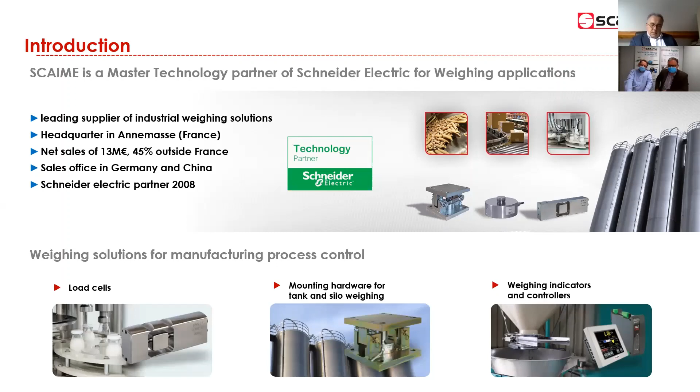So when we mean solution for weighing, we mean all the products designed and manufactured by SCAIME. That includes a very comprehensive range of load cells for all types of application and all types of capacities of measurement, from 200 grams for the very light weighing application, up to the heavy duty ones, 1,000 ton per load cell. It includes also the mechanical environment of the load cell, that is to say the mounting kits, which help to adapt the load cell into its environment, for instance, a tank or a hopper weighing. And third part of the measuring chain, the weighing indicators, the weighing controllers, and the related softwares.

So here we have a nice picture of a typical manufacturing site. And in this manufacturing site, SCAIME can display its areas of expertise, not only on plant engineering, but also on machine control. We provide solutions to both types, whatever the field of production, so it can be food and beverage, metals and materials, chemicals, waste, logistic, etc. So on the right-hand side, you see the types of application where we have a complete solution: load cell, mounting kit, electronics, standard platform weighing, of course, but also tank and hopper weighing, continuous weight, dynamic weighing, like belt weighing, loss in weight feeding, filling by batch applications, and sorting and check weighing applications. For all that, we have a solution or several solutions.

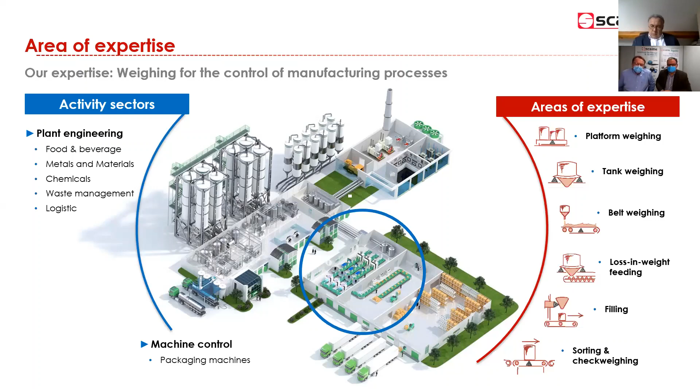So this is an interesting diagram which shows step by step what you can find in a production site. And at each step of the way, you have a possibility to face a challenge or a question of how do I weigh that? So it starts with storage and static weighing on silo, then some belt weighing, so weighing in motion, continuous weighing, loss in weight feeding, which is also another type of dynamic weighing, batch dosing, filling or bagging, so the packaging side. So we get closer to the end of the process and finally check weighing at the end of line.

Yet again, at each step of the way, SCAIME has a dedicated solution, not only with the load cell, but with some transmitters and softwares around those transmitters which are able to monitor specific applications, specific functionalities. All this being monitored globally by PLCs, and that's where the cooperation with Schneider Electric is highlighted.

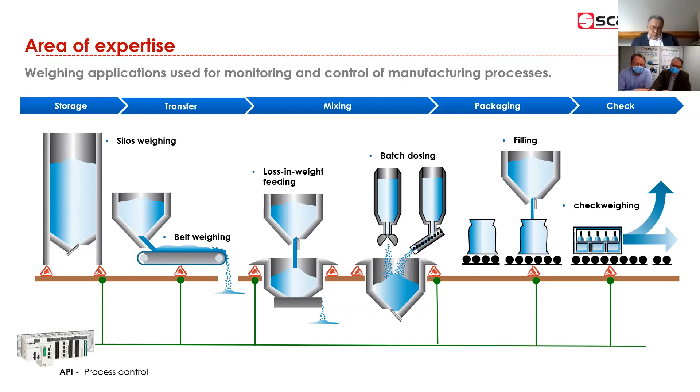This is an overview, and of course you have much more detailed information on our website, product by product, but this is an overview of the scope of load cells and mounting kits according to nominal capacities that you can use, that you can recommend, or that you can prescribe for some of the weighing applications. On the pictures on the top of the slide, you see different types of applications, different types of tanks, hoppers, hanging scales, belts, conveyor belts, etc.

Different types of mounting, different number of weighing points, let's say, and for each of them we have the answer, not only for the load cell but also for the mounting kit. Load cells that cover not only the range of capacity but also extremely rugged load cells adapted for rough environments with hermetically sealed design, and also possibly as an option ATEX protection for potentially explosive atmospheres. Okay, so clearly a very extensive range of mounting hardware.

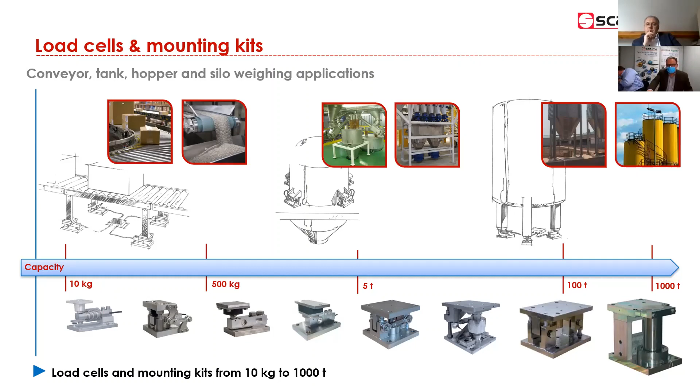So let's talk about the electronics which are connected to these load cells and how they interact. They are able to interact with the Schneider equipment. Everything comes into a name. The name is EcoStruxure, in which our systems are well adapted, and we are, I would say, easily included in these architectures. So we have two levels of capacity to offer weighing equipment.

We have the machine or plant level, but let's say it's more a midway between machine and plant, where we can offer our eNod4 series, which are electronic controllers able to communicate with the API using either Ethernet IP. It's clear that the trend of the market goes more and more in the direction of industrial Ethernet communication capabilities. CANopen, which is also a kind of network well used in the Schneider range for quite a few years. And for the remaining equipment that we can find on the market, RS485 Modbus TCP communication is also a solution.

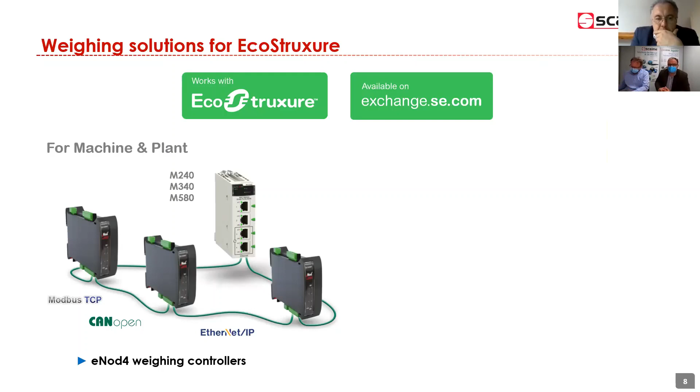For the plant level, we also have the possibility to provide our PMESWT, which is more or less, let's say, an eNod4, but in Schneider packaging, which gives it the capability to be directly connected to the backplane of the API. So in this case, we will talk of M580 and X80 drops in order to provide the weighing information to the automated system in order to do whatever it has to do in terms of mixing or measuring level or whatever.

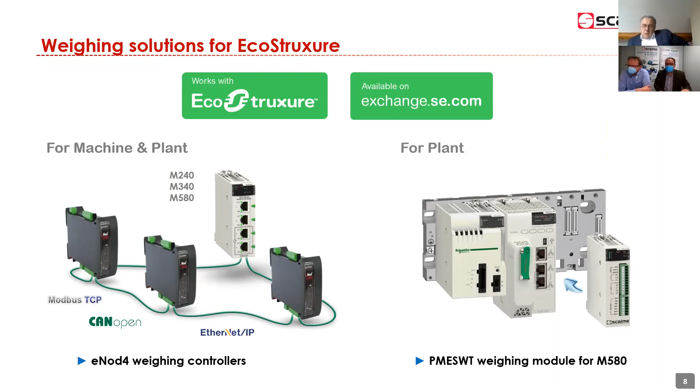So if we go a little bit more in detail, talking of this PMESWT, as I said, you can connect it directly on the CPU rack or on the X80 RIO drop. The communication between our module and the M580 is Ethernet, which gives a lot of transparency. Well, the transparency of the system is complete because it can go up to higher levels of automation down to the real device, and our device will be exactly in this wave. And we have, of course, a local possibility to connect an HMI independently from the PLC, and we also have local inputs and outputs.

So the load cells will connect on these modules. We can connect up to 6 load cells through a junction box, so everything can be provided by SCAIME and can be easily included in the Schneider architecture.

In terms of made easy, what would I say? Implementation. Thank you. I was looking for my words. Into the EcoStruxure Control Expert. So its integration. We do provide different tools.

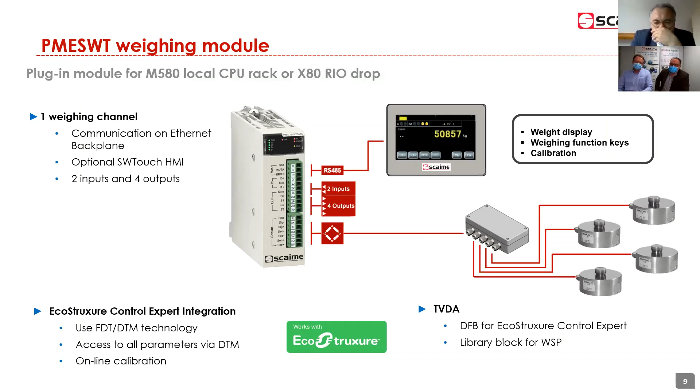Looking at the eNod4, this product has the advantage to be extremely versatile. We have two subfamilies. This controller can be included in little DIN rail boxes, so that you can just plug it by the API, or you can also have it inside a stainless steel housing, and you can also integrate on this housing an HMI, which will be connected to the eNod4. Doing this, you have some kind of indicator that can be installed locally in your workshop with a product which meets industrial standards. So that's for the product itself.

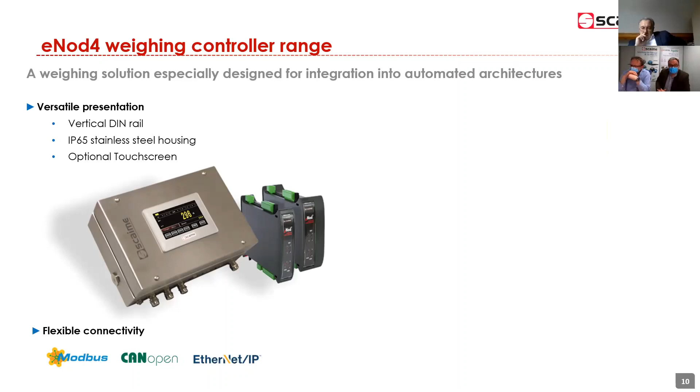In terms of communication, the product will be able to communicate with the Schneider equipment with either, as I said, Modbus RTU in RS485, CANopen, or Ethernet IP. To ease the configuration, we also provide as an option a Bluetooth communication port, which will be able to connect our eNod4 to a smartphone using our app. This eNodApp will bring all the features that you would find on an indicator. In other terms, you can access all parameters and all information from the eNod4 using this software

on your smartphone. We also have an integrated web server in the eNod4, so you can remotely access all parameters also, and do everything you need to do with the configuration. And we also have our eNodView PC software, which is a full solution, including all accessible parameters and the possibility to select and test different filters. So that's really a very extensive software, which makes life very easy for the people in charge of the installation and configuration.

We also have, for these eNods, a library called PLCLib, which is composed of a number of function blocks which have been developed in EcoStruxure Control Expert. They are able to be easily integrated into the EcoStruxure Control Expert system. All these function blocks are available from our website, free of charge, or you can also download them from the Exchange platform from Schneider Electric, but we will let you know a bit more about it in a later slide.

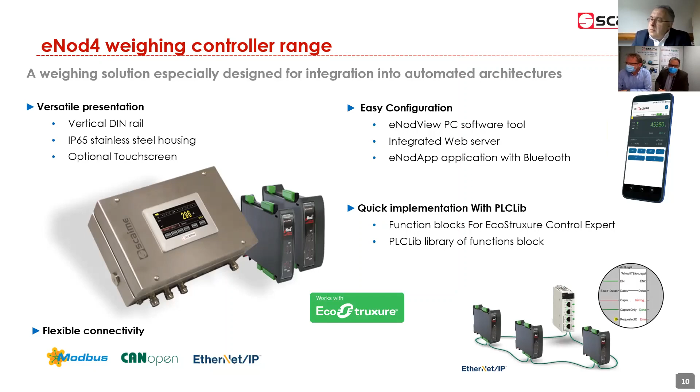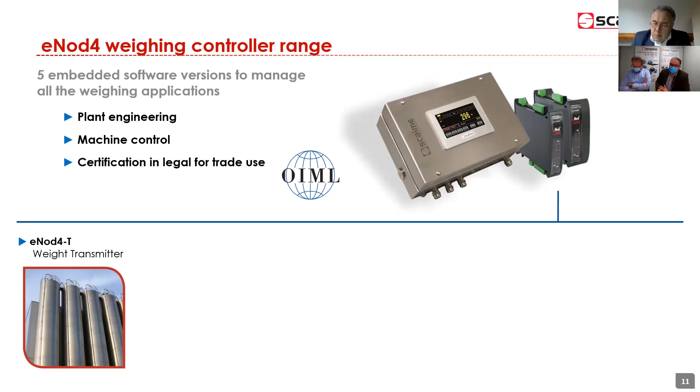On these eNod4, and that's one of the differences between eNod4 and the PMESWT, we also have specific application software which is embedded. In that case, the API will be able to subcontract larger functions to this kind of module in order to ease the global functioning of the complete system. eNod4-T is a simple weight transmitter, very accurate, very quick, but it doesn't take care of any specific application software. eNod4-D specializes with this D program in dosing and filling by batch, with its own IOs if necessary.

The C program, eNod4-C, will take care of check weighing applications, so dynamically catching the weight of a parcel, for example, on a conveyor. With eNod4-B, we are talking of continuous weighing or dosing. It can be weighing and totalizing all the material going on a belt during a certain amount of time, or it could also be dosing using a regulation calculation which is internal to the eNod4. In that case, the eNod4 would receive the inquiries from the API and would give the information back on the amount of product dosed in real time, and on the amount of product available at different stages of the process.

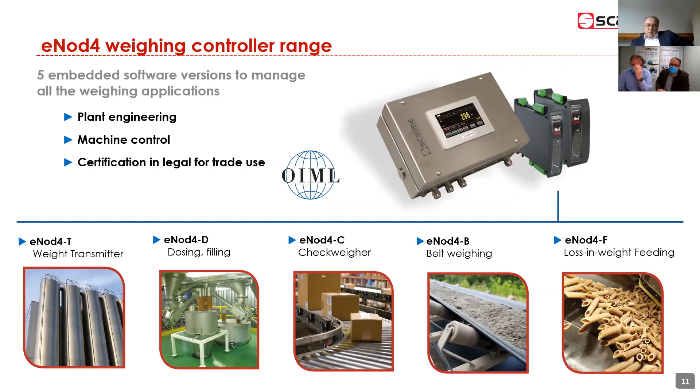The last, as of now, is our eNod4-F, which includes a loss-in-weight feeding system. So that's an even more sophisticated product. And all these different applications, as Christophe mentioned at the beginning of this presentation, give the possibility to use our products in many different cases that you may find in the industry, either in the dosing or in the mixing processes.

So to have a kind of global vision of what we can offer, here you see the eNod4 solutions: the transmitter, the dosing by batch, the check weigher, the belt weighing, and the continuous feeder. For each of these programs, you have certification, because our modules can be certified for legal for trade applications. The only one which is not yet certified is the belt weighing. And for the continuous feeding, there is no regulation; it's purely for internal use. So legal for trade in Europe. Legal for trade in Europe, you are absolutely right. You have the possibility to add a local HMI on all of these versions.

In terms of connectivity, the full range of networks to which our module can be connected are CANopen, Profibus DP, Modbus RTU, Modbus TCP, Ethernet IP, Profinet, and EtherCAT. That's just to say that we cover a wide range of applications, and it can work either in machinery or in process control. So I think that Eric had something to add about this.

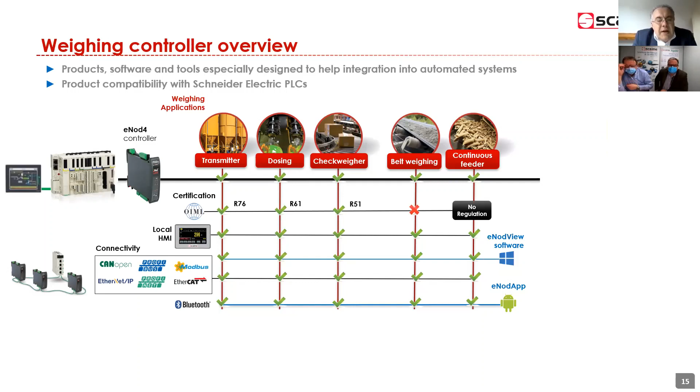And then the final one is, of course, the module that is completely embedded inside of the M580 PLC, Modicon PLC. So this is the PMESWT, completely inside of the CPU rack, let's say.

On top of that, because this is not enough, we want to highlight, as Philippe and Christophe said, it's good to have good hardware, good connectivity, but we have to have function blocks predefined, pre-designed, to save the time of the engineering, save the time of the commissioning, save the time of the maintenance. And that's the libraries that Philippe was talking about.

And on top, and I will help you to pronounce the name, Philippe, we have the documents that are not only just a piece of paper, but that include also a typical application that is already pre-programmed, tested, validated, and documented, full architecture, again, to make sure you don't have to reinvent anything and can make the weighing system work within a very short time without having to reinvent and rediscover everything.

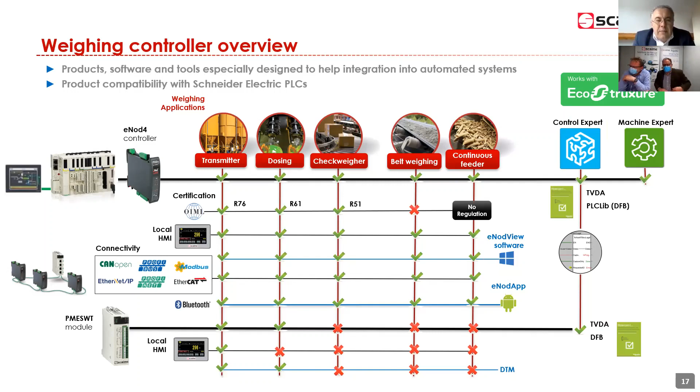Philippe? Yep. Okay, so I think we can slide to information that you wanted to share with all of us. Sure, thank you, Philippe. And I take this opportunity to say good day to all of you attending this conference.

So yeah, in Schneider, we have a technology partner program for years. We have some registered, some certified, and a limited number of supermaster partners. SCAIME is one of the supermaster technology partners of Schneider. And this is really because we are working together. And I want to highlight this along the next slide.

SCAIME is the technology partner of Telemecanique since last century, I mean 1993, and Telemecanique became Schneider. Then SCAIME became the weighing technology partner of Schneider Electric in 2008.

SCAIME has been the first one to use the development kit of the X80 I/O and rack that are used in Modicon M580. First one to use the kit to design the first third-party partner specific module. And I really want to thank SCAIME for that, because being the first one is always kind of tricky, but it was okay, and thanks to you and the great partnership.

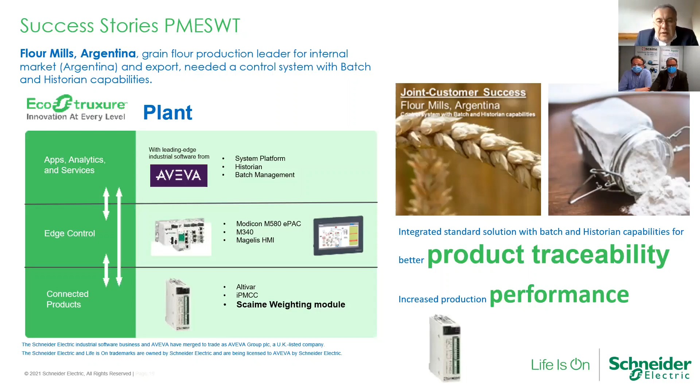The key word on this application was really full product traceability and really high level of weighing performance. And this was achieved easily with SCAIME. Next page.

Just another one. This one is in Africa. This is a brewery. And obviously here, the fact that we have an embedded SCAIME module was extremely important for the easiness of engineering, commissioning, and more importantly, the easiness of maintenance. Simplification was the key word here, and it was done in a very smooth way together. Next one.

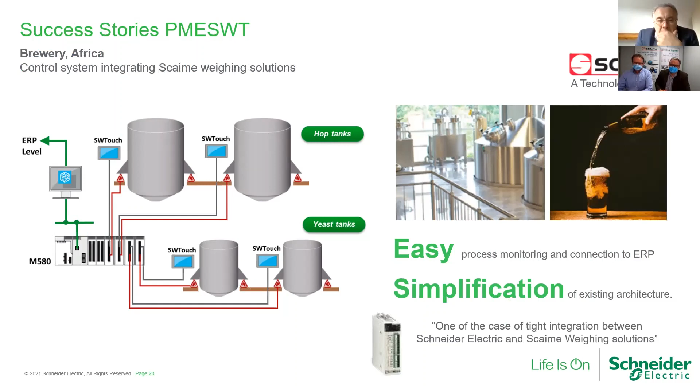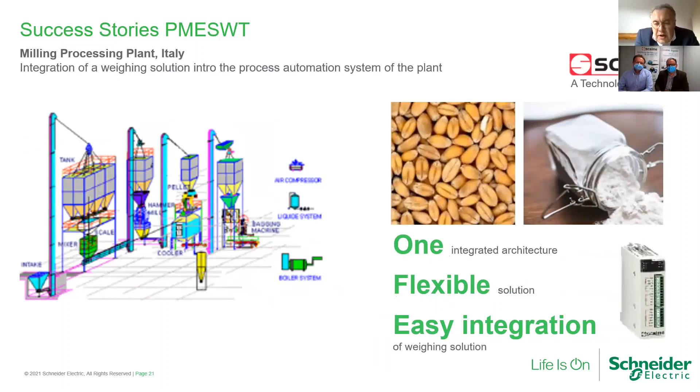This one is in Italy. So it's a milling process plant in Italy, and here there was really a clear need for one integrated architecture, flexibility at the same time, and very easy integration. And that was provided by the TVDA and the function blocks and the libraries. Next one.

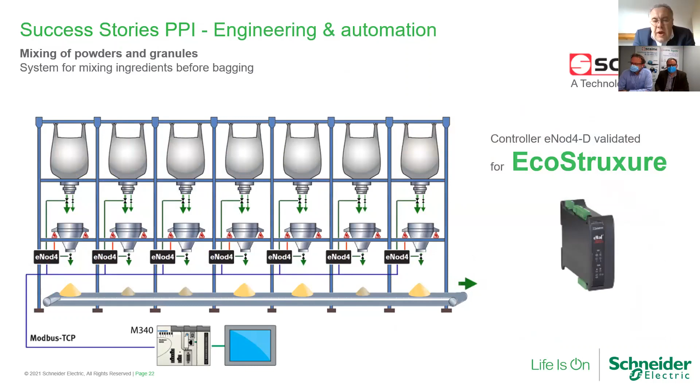Okay, so this is another one. It's a mixing of powder and granules. Again, M340. This time, M340 through Ethernet, Modbus TCP/IP was connected to several eNod4 SCAIME devices, and it was perfectly easy to design and fully embedded into the EcoStruxure philosophy and strategy of Schneider. Next one.

I like this one even better. In this case, this is robotic. So the controller is a PacDrive motion controller from Schneider, connected via CANopen to the eNod4. So very fast response time in a very demanding robotic environment, completely integrated. And that's a way to demonstrate to you that we have different levels of architecture, but all of them can serve the process control, the machine control, and also the packaging control that is really usually high-speed demanding application. Next page.

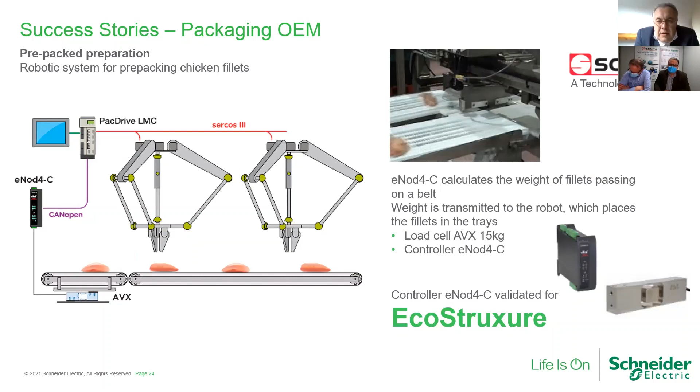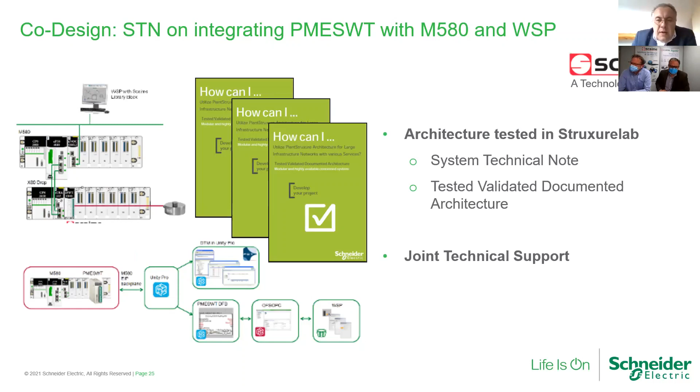And I will add, and that's a personal one, that I know for sure that our two technical support teams know each other well, and they're working together. So it's really transparent and fluid for you. And I think it's absolutely a key added value. Next page. And we had quite a few experiences where this working together was really appreciated. Yes, which doesn't mean we have a lot of problems, by the way.

Okay, so I will take the floor for a minute, just to say that we have available resources on the exchange.se.com platform, which is made available by Schneider Electric. So this platform gives you the possibility to connect with peers and experts, find service providers, and shop digital products. So SCAIME is present there. So we are integrated in the Schneider Electric Exchange ecosystem. And you will find all kinds of information and resources linked to our products, which are, one more time, eNod4-T, CGBF, and PMESWT.

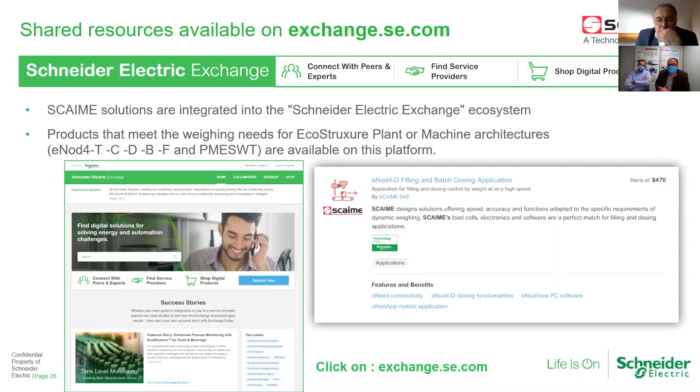From this platform, and you have here a little vision of one of the pages, you will easily access all kinds of information. You will also have success stories being displayed. For example, this one is about that brewery in Africa Eric was mentioning before. And you can also go in the shop area. You can go much deeper into the products and the software material which is provided. So here in the example we have eNod4-D filling, which brings us to the next slide, where you can have an overview of the products, the benefits that you can get out of it, and you can also have a clear vision of all the features which are available, as well as pricing information.

So then you can also connect, chat with the team, which is very efficient on the Schneider side, and they will give you all necessary information you might need, and will forward to us when the information is more on our side. So that works pretty well, and I think it was launched, when was it, a year and a half ago or 2 years ago?

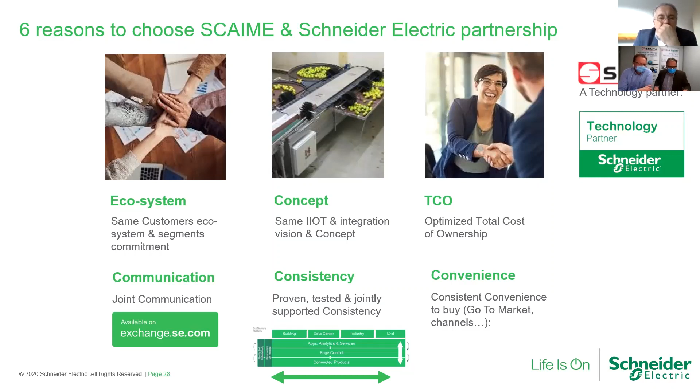Okay, I think we've gone through the different topics we wanted to discuss today. We'll have, of course, a question and answer session on the subjects discussed today. So Yvan is giving me some questions which have been received, so maybe we can take a look at that.

So Christophe, well, the first question seems to come from somebody involved in a modernization job, I'd say: can the PMESWT module or the eNod4 replace an ISPY weighing module on an old premium installation? So I guess it's a question for you, Eric. Looks like it - I was afraid of that.

Okay, so if you have a premium PLC, legacy Schneider, and you want to upgrade to Modicon M340, Modicon M580, or the new one, of course you can do it, and you can do it in 2 ways. The first way is you keep your IO rack, the premium IO rack including the weighing devices, and you connect directly to a Modicon M340, M580 CPU.

And we have for that, guess what? TVDA, of course, but also software conversion tool and hardware adaptation kits. And therefore, you don't change anything.

You can also get rid of the premium IO rack and the legacy weighing solution, and then connect to the embedded inside M580 weighing device, or connect some eNod4, knowing that in both cases, your load cells can be kept. You don't need to change it.